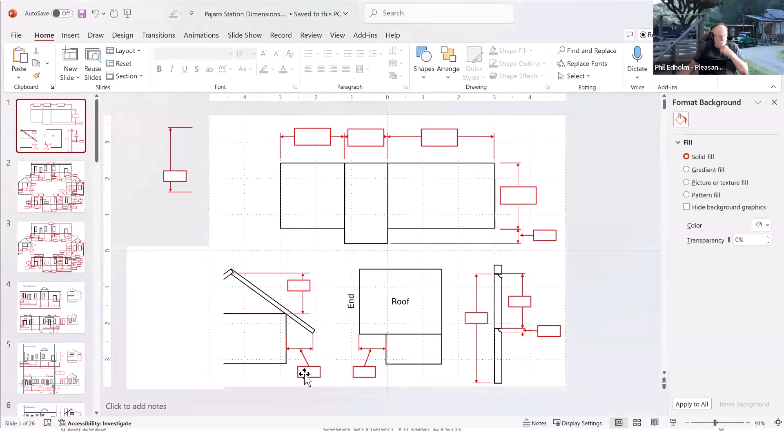I started figuring out what measurements I needed, drew this out, and put places on it. So when I went there, I had all the measurements laid out: the siding, the overhangs on the roof on either end, the basic footprint of the building. Then based on pictures I found on the internet, I did side profiles showing where all the windows and doors were, putting in all the dimensions. By printing these two sheets out and taking them with me, I had a reference.

The cool thing about this tool on your phone is you can walk up to the building, click to start here, walk from here to here, click again, and it gives you that dimension. Keep walking, click here, get another dimension, keep walking, click again, get another. It literally takes about 40 seconds to get 3 dimensions off the building, no tape measures involved.

What is the underlying technology - just the fact that the phone knows where it's at? It uses a combination of the picture and the GPS to figure out the position of a point in space, and positions that point accurately, so when you move the pointer 10 feet to another point, it knows in 3-dimensional space where you moved it.

Pretty neat. If you've never played with it, just click on the measure tool - you pick the thing, you'll see a point in the middle, there's a little button, click on that, then move it and click again, and you'll get the distance in between. It'll show you exactly what the distance is.

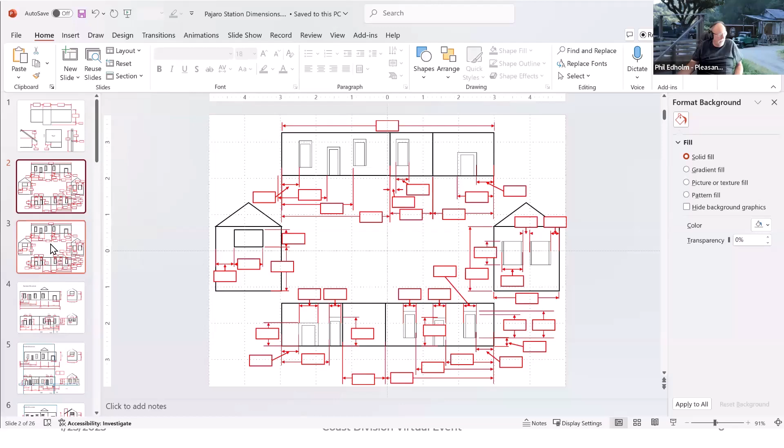Makes life really easy. So basically what I did then was take that and develop it, and it turns out my structure can't be that size because I'm limited to 12 inches - it's a little bit larger than this blue box. So what I've done is shrink the building proportionally.

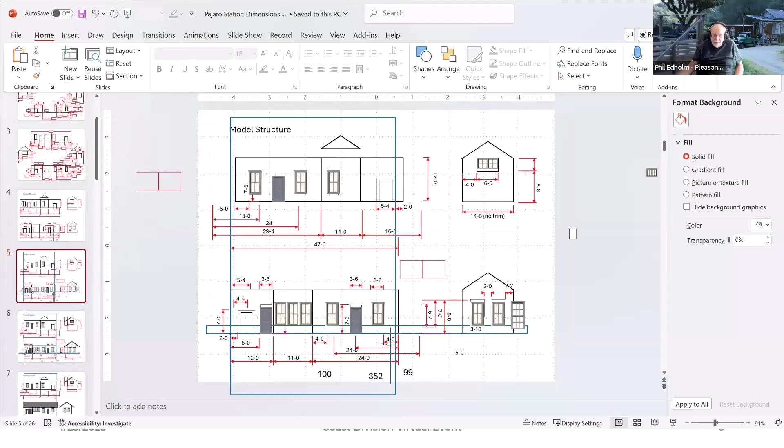Then of course the problem is I ended up going and taking some pictures when I went and measured it. What I figured out was that all of the windows and doors, going back to pictures from the 1890s and 1900s, have these pretty amazing architectural details on top. It looks like somebody was used to building mantles, and they put mantles on top of all the doors.

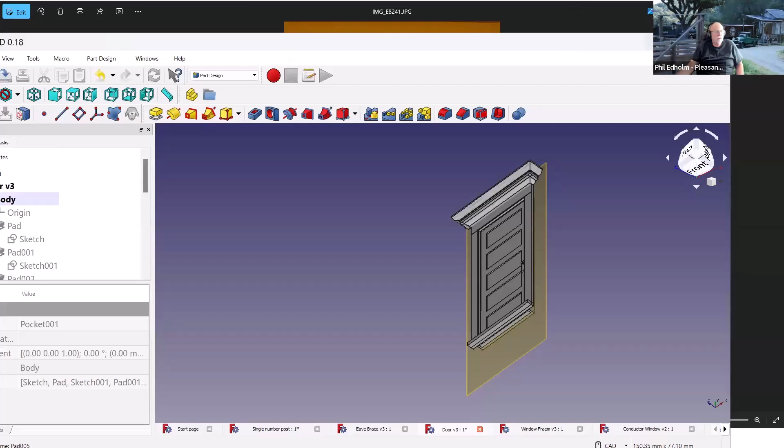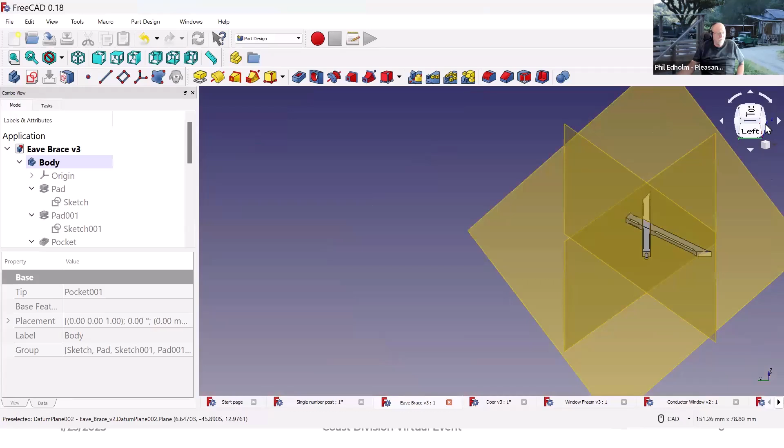So what I've been doing now is this - this is a door in FreeCAD. That's a door. This is the brackets that go on the end walls - if you look here, there are these brackets on the walls. So I've basically recreated that in FreeCAD. It's kind of hard to see here in this image because it's buried in all the planes used to create the stuff, and then the window frames.

So Fran is actually printing this stuff on his resin printer for me now. I appreciate him doing it because I don't have a resin printer, so hopefully I'll get that done. It actually turns out to be a 12-inch base, like a 12 by 8-inch base, so I'll have room to put a track on a piece of foam and make it look like a 12 by 12 thing to get by.

I have those lintels all over my house, over doors. The house was built in 1910, and we found out that was sort of throwaway apprentice work. These poor guys were getting like a dollar a day, and they would build these things up and just put them in and cut them. I've got them over weird places like bathroom doors.

Oh yeah, it's kind of like crown molding. Exactly. We did an addition on our house, and the guy came in and did the sheetrock, and there were wiggly lines at the top. I said, this is awful. He said, well, aren't you going to put crown molding up? I said, no, we're not, it didn't fit the house. He said, oh, you mean I actually have to make straight lines? It was quite the moment of excitement for the contractor.

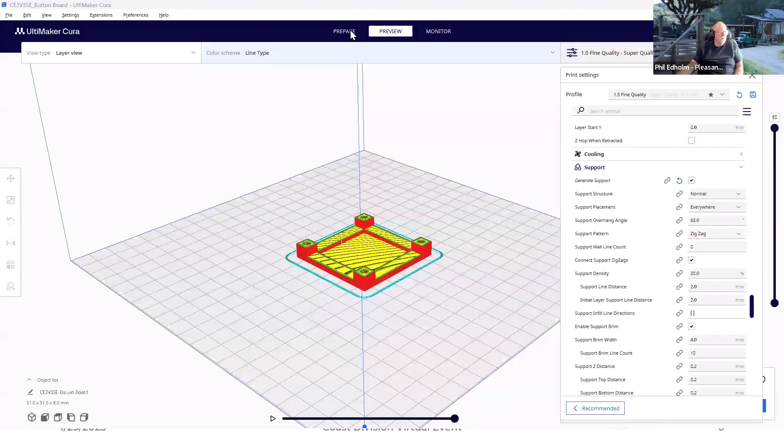So this is Cura. Now, this is not a resin printer, this is the slicer. This thing here is actually a button board. Let me show you something different here.

Let me pull this down - this is another project I've been working on. This is a holder for a Switch8, which is a DCC board for 8 turnouts. Because we have so much current demand on our turnouts, you can't use it directly, so this board combines with a couple other little boards that hold single board relays. They look like this - these are a dollar each on Amazon.

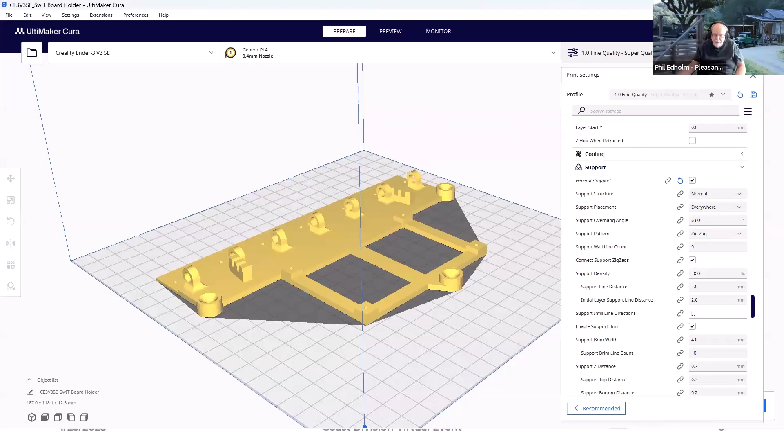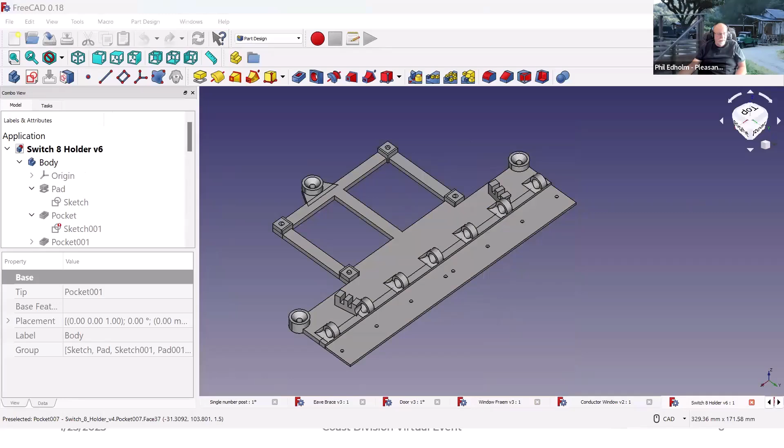So this was defined in FreeCAD as a file somewhere in here - this is the Switch 8 holder file. This file here is actually the FreeCAD definition of all the things that make up that item. Then you basically load it down into here, and once it's loaded, you go ahead and slice it.

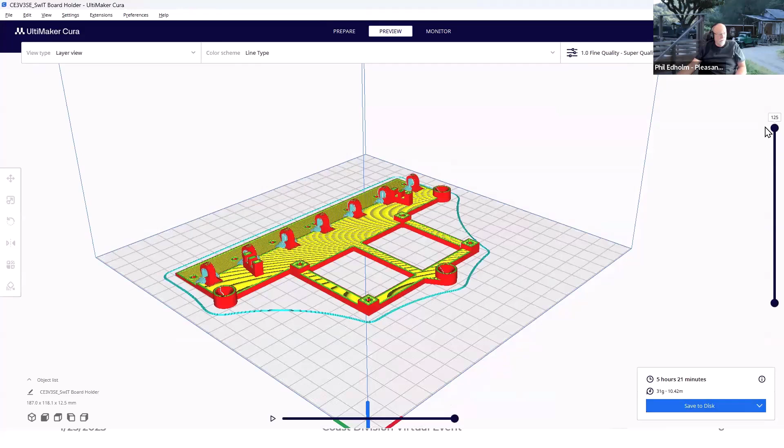What this does is it goes through a process, and it takes a second. It figures out what the instructions should be, and then it lets you look at it - this is actually the object, and you can look at what all the layers look like and see how it builds up.

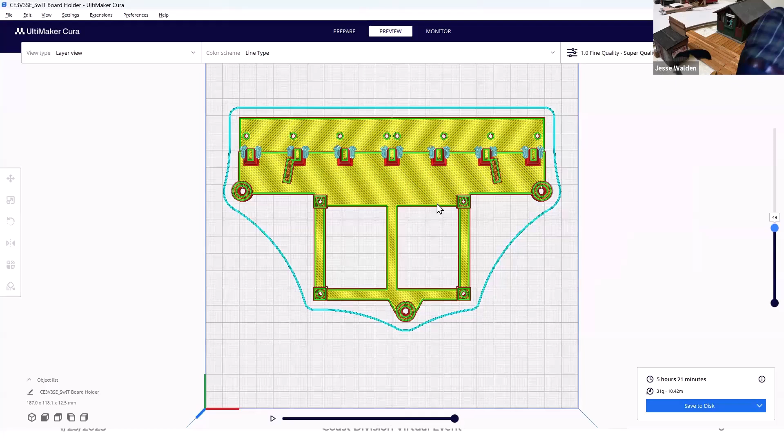What's nice is if you take this view, you can go in and actually see at each layer. I've got a separate tool which lets you pick one of these layers and decide whether you want the head to run this way. If you pick a layer here, you can actually watch what it does on that layer.

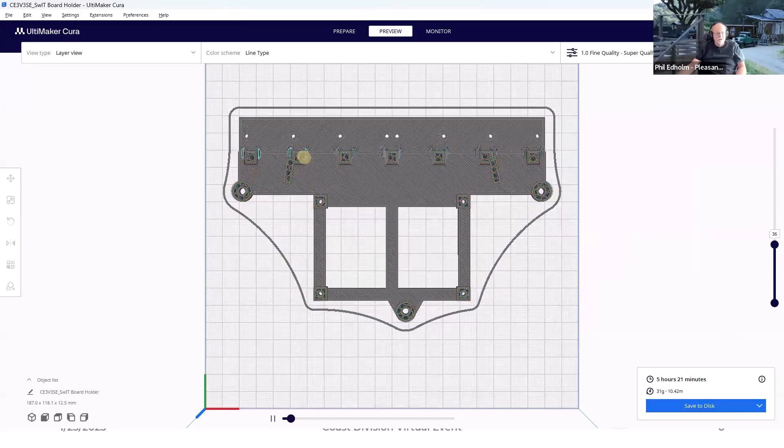So that's actually telling the print head what to do - this is showing how a filament printer works. But the resin printer works very similarly in terms of defining something that goes to the resin printer, which basically does a shot. Each layer is a shot on the light system, and it does the same thing - it figures out, on this layer, which of the elements on the light should turn on to burn a pixel in the plastic. It's the same kind of concept; each layer gets treated the same way, except the resin does it as a single shot.

Fran did a Tinkercad clinic, which I would recommend for most people. I started using FreeCAD, I just haven't changed. I think Tinkercad's a lot easier to use. I've been using Tinkercad, it takes a while. It's got a learning curve, but you just have to keep making things with it to get the hang of it.

So this basically then, I got to turn off my background here. The problem with having a background on is you can't show things. So this is one of the things the filament printer is really good for, doing all these kinds of tools and other stuff.

So I don't think Tinkercad is free anymore. It is still free. What was your thought about Tinkercad not being free anymore, Ken? The last time I tried to use it, I got a thing from Autodesk that said I needed a subscription. Yeah, you have to have a subscription, but it's a free subscription. It's online now, they used to have an offline app, but it's all purely online now.

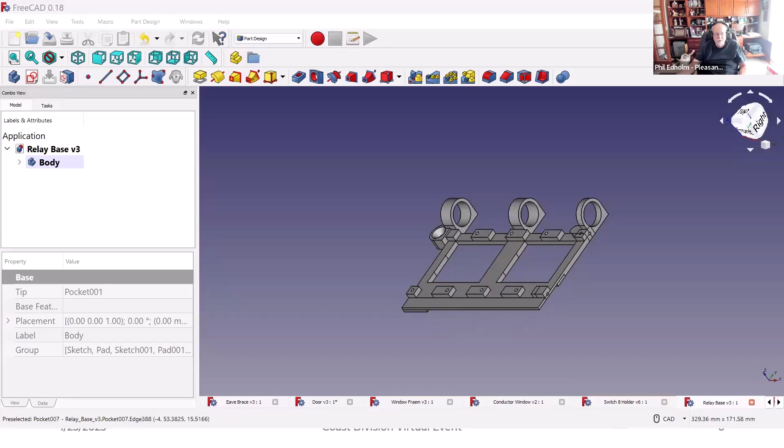So one of the things you have to do is, this is big enough that you have to have it in three pieces. So basically the way this works is this piece here, if you notice, it's cut in there. That actually glues on top of the piece I showed you that's already done printing, and this holds the relays, these individual relays here. That's actually on the printer right now.

So the idea is you take the output of the switch 8, which is this guy, and this controls 8 turnouts, and then there's a relay for each one of the turnouts that sits here and connects over here with a couple of diodes, so that you can run 2 or 3 sets of LEDs and 2 turnouts on each output.

Because the switch 8 only has about a 40 milliamp output current, and that's not enough to run things. What happened when we started connecting the switches to the layout in Pleasanton, the first time we did it, instead of getting 14-volt output, we got 3-volt output because there was so much load between the turnout motors and all the LEDs that were on each line to show people at different places what was going on.

We don't worry about current when you're controlling things with a double pole, double throw switch.

Fun toys. So, who else has something to share today?

I don't know, I'm just sort of mulling things around, talking about things to present. I'm sort of going back to my earliest attempt at a profession as a historian, and I'm very interested in what we call business history, which in our case is specifically railroad history. Not viewed as a simple outline of when the track was laid, but more along the economic business rationales and how these things grew over time.

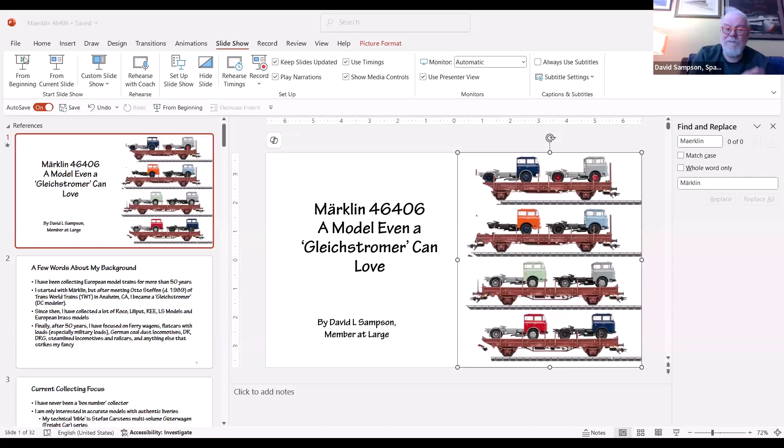I'm an NMRA member, but I'm also a member of European Train Enthusiasts on and off for quite some time. This is a club that was started in Sacramento, but now has chapters all over the United States. And this is the kind of stuff I tend to do.

I'm 75. I've been collecting for 50 years. Doesn't mean I've gotten any smarter, but now I'm kind of interested in looking at models and seeing whether they're prototypically accurate rather than simply going out and buying them.

So at least a recent piece of analysis I did was on a Marklin model. Most of you probably know Marklin is nominally for AC, but this is kind of a tongue-in-cheek thing where I say, well, here's this Marklin model of 46406, and it's a model that even a Gleichstromer can love, and a Gleichstromer is a DC person.

Within the club, we used to have like two sides. There were the Marklin people, which we derisively called Marklinistas, and then there were the DC people who were the other extreme. So I went through this set, which is kind of interesting.

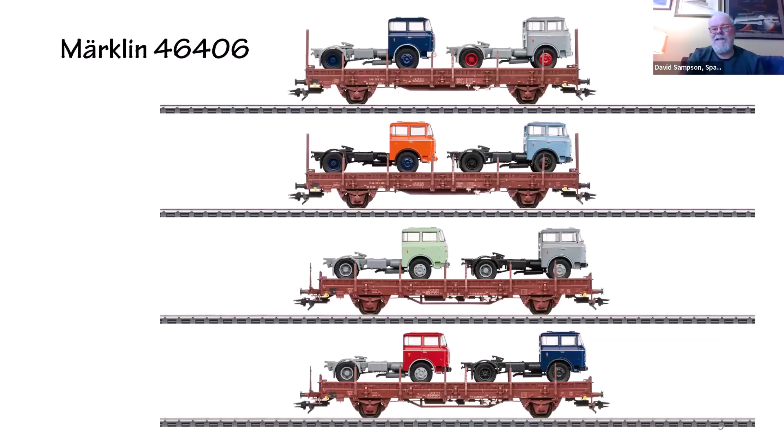This is background, you don't care about that. This is what the set looks like. It sells for $260 to $300 retail. Marklin on their website has a description of it, and it's kind of interesting because it's actually got two each of two different kinds of railroad cars.

And these railroad cars were actually built for the East German Railroad. And that was in itself kind of interesting, because in their crazy planned economy over there, East Germany didn't have in its job jar building these railroad cars.

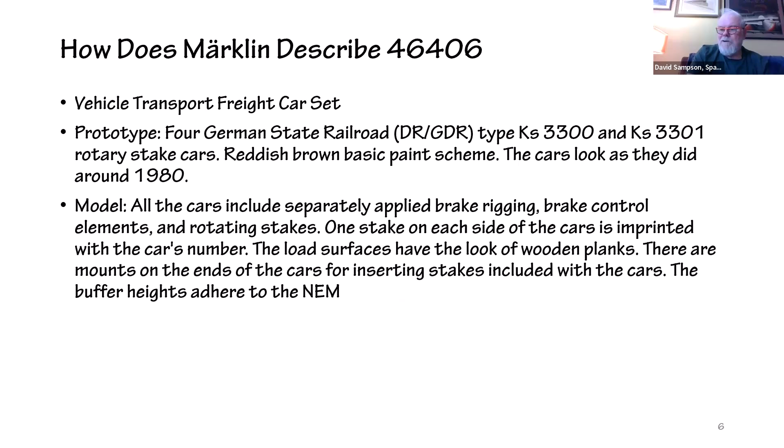So they had to go to a manufacturer in Romania, which was kind of interesting. Let me jump to the more interesting thing. You've got a total of 4 stake cars and 8 nice tractor trailers. So here's a template I use: first I want to talk about the prototype.

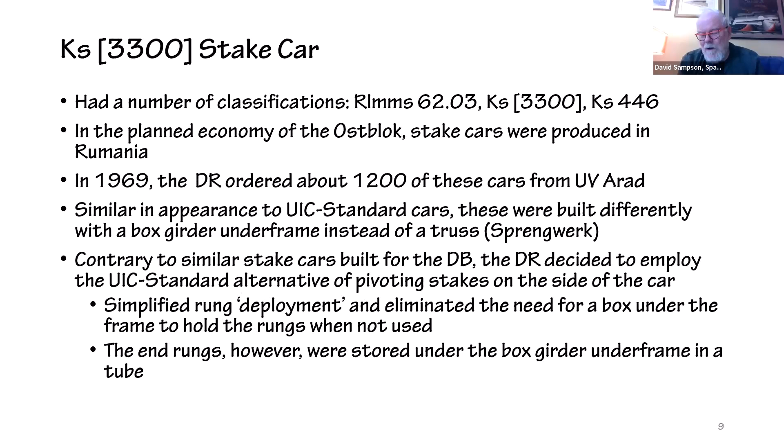This is one of the stake cars, a KS 3300. What's different about it? When was it made? How many were produced? Sometimes I talk about what happened after the change, when East Germany didn't exist anymore. Turns out these cars were pretty popular and were taken over by the new West German Railroad. I'm just trying to give you an idea of what I talk about.

Then there's a page or two about the other stake car, which I screwed up there, which is another thing.

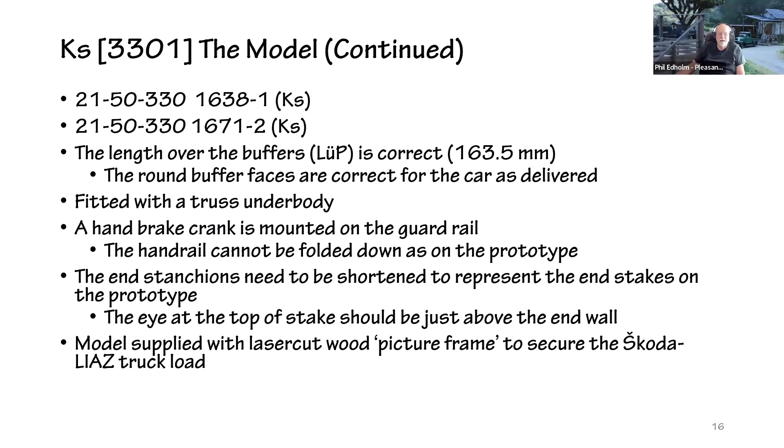David, is there a way I can contact you offline? Sure. I spent 19 months with the 3rd Armored Division in Germany in the 1960s, but still. I think you can see my email in some NMRA database or something. Dave, why don't you just throw it in the chat? Post it in the chat maybe. Yeah, I'll do that. I'll email it as soon as I get that done.

So yeah, I talk about that other car. This is kind of a joke - you always have to have some humor when you're making these presentations.

One of the problems I noted with these cars is that they're stake cars, and East Germany chose the kind where the stake is permanently installed on the side and simply rotated into the vertical position. Oddly enough, when you look at the stakes, one has the car serial number on it, but when the stake is folded down, the serial number's upside down. What the hell - Marklin's not that stupid. How did they ever manage to do this?

So I thought about this for a couple of days. Let's go to the next slide here. We're going to try to go to the next slide.

Turns out this freight car is sold in another set. I found this out not because I have a giant collection of Marklin catalogs, but the Marklin website works like Amazon - when you buy a product, at the bottom it says if you bought this, you might be interested in something else. So I found out about this other model, 45042. I looked at pictures of it, and lo and behold, the numbers when the stake is folded down are not upside down.

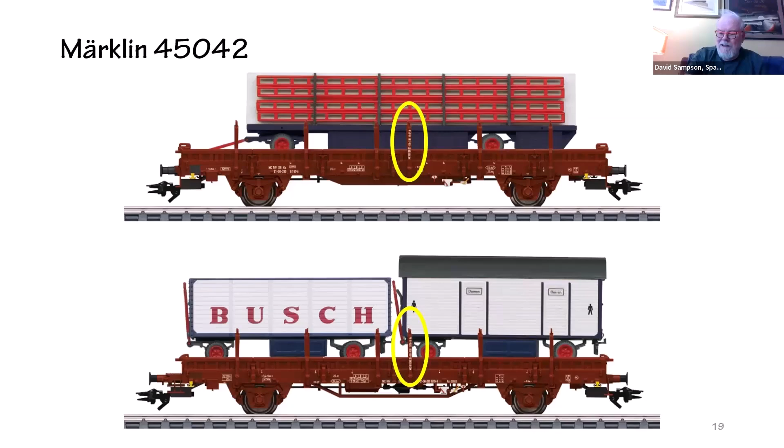This bothered me, I slept on it, and finally concluded this was an assembly problem - that Marklin had put these stakes in the wrong place. When you look at the side of a car, this yellow oval represents something near the middle: cars to the right, the stakes rotate clockwise, and stakes to the left of the middle rotate counterclockwise. So all you have to do is move the stakes around. Luckily, that's easy to do. I won't go into all the details.

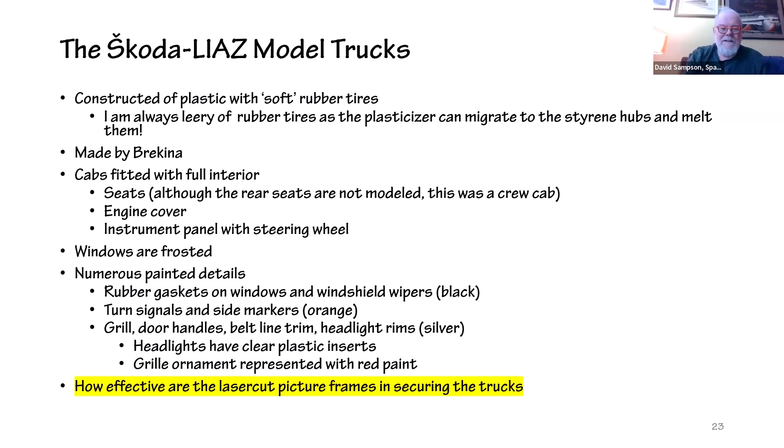Then it got kind of interesting looking at the trucks that were the freight car loads on here. The trucks are Skodas, and unfortunately I don't recall - besides, there's not a lot of information about these Skoda trucks. But they're nice models. Marklin didn't make them; they were made by another company called Retina.

And then I'm a collector at heart, and I found out that Marklin did some really nasty stuff to confound the collectors. First of all, this model never appeared in the annual catalog. It never appeared in the catalog that showed all the new models for 2024. It appeared only in one catalog that showed the summer novelty models.

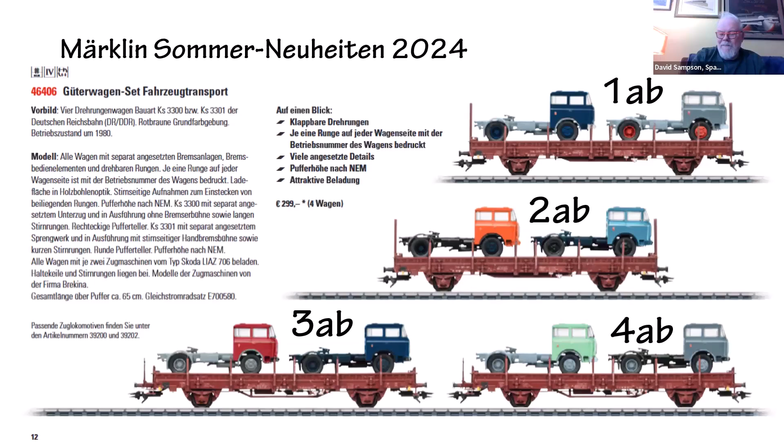Okay, so here's a picture of it, and I've identified all the trucks. There's car one, with an A and a B, the left and the right. Then car two, with a left and a right. So then you go look at the website art, and the website art is a little squirrely here because they interchange the order of 3 and 4 - so obviously the art department isn't talking to somebody else.

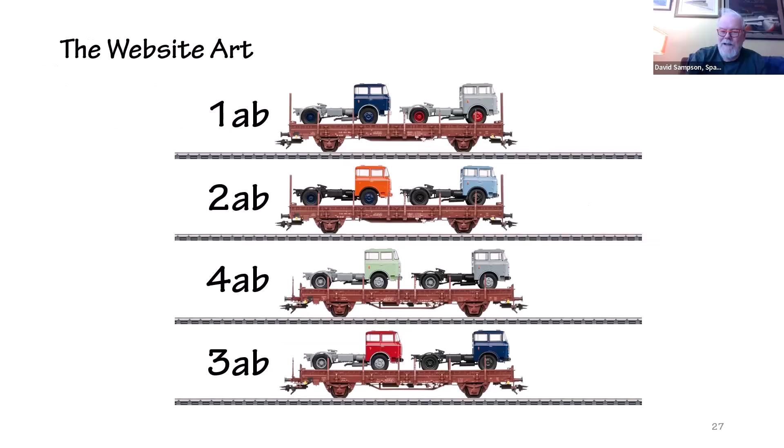But then you look at the box art on the model, they scrambled it again. So this is kind of funny. You know, it's not order 1, 2, 3, 4. It's order 4, 3, 2, 1.

But where it really got devious is when you look at what's in the box. I'll tell you, you had to work to scramble things up as badly as it is in the box. And, you know, how this happened, it's one of the mysteries of a major toy manufacturer.

And I talk about the wheels because the wheels that Marklin puts on their models do not meet NMRA standards. They're non-isolated, non-insulated, and they're also NEM flanges, not NMRA flanges. But luckily, there's some enterprising little shop in Berlin, very difficult to deal with, that makes isolated wheel sets with RP25 flanges.

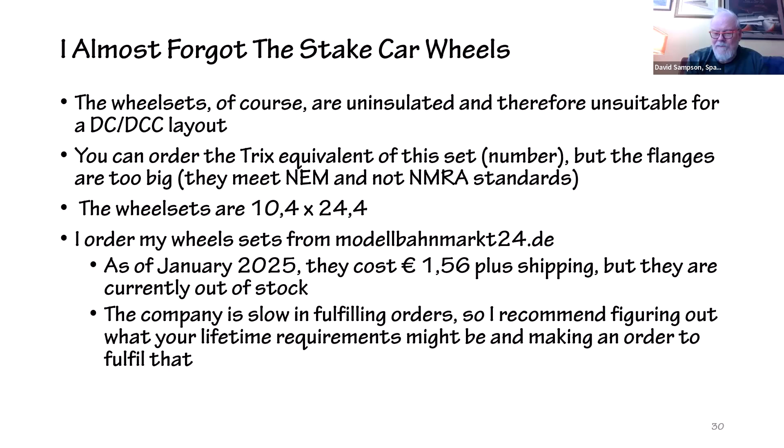Okay, so in any event, that's kind of what keeps me interested now besides collecting and operating my trains. I'll stop the share here. And so that's what floats my boat.

I'm done. Nice research. Pretty good. Yeah, pretty good. Good. Well done. Thanks for sharing that. Yeah.

Okay. I have to go and push bread around. That's my other big hobby, by the way. I make bread. And so we get up at 6 o'clock, that's where the dough is. So.

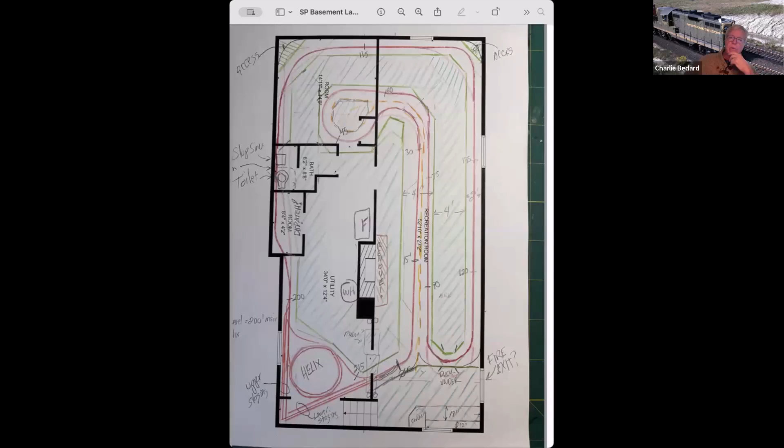So I'm going to make a completely different comment. I would not take out the concrete wall. I think you're buying into it. So if you basically said where that loop is on the bottom right, where you've got the duck under on the bottom right.

Oh, here. Yes, the return. If you move that up about 4 or 5 feet and just carry it all the way over to the wall where the furnace is, that aisleway becomes very wide there. Then you run it around and put a loop up at the top that goes from the right side of the concrete wall through the wall to the left side, from there over to the left side and back down the left side.

So what you do is you basically come into the layout by the door that's by the helix. You walk in there, walk up, go in the door right there. Right here? No, your left. Turn to your left — where you just went straight is blocked off. So that's how you enter the layout.

Then you go around the room to the other side. The other side, you come around there, come back down, and that's a very wide aisle with the layout. You run the layout around the water heater and the furnace on the other side, where you come in there.

So now you basically go around the wall and use the wall on either side. That way you only have to cut one hole in the wall at the top to go through, up here. So what you can do is leave the rest of the wall just the way it is, and use it as your room break.

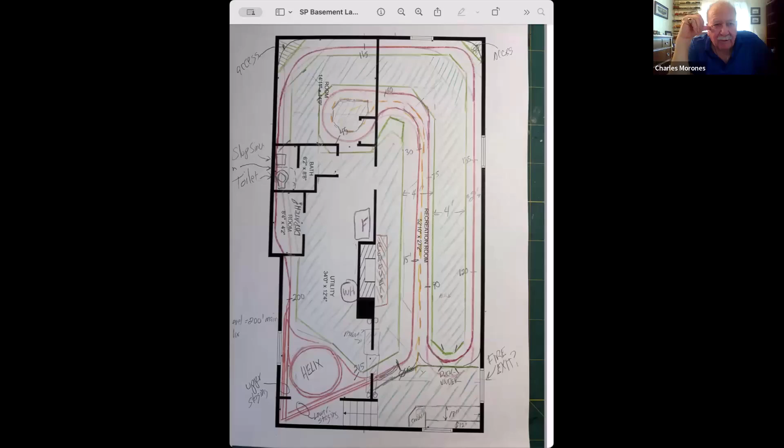Okay, the next person had a thought. Yeah David, your toilet there -- you want to have 3 foot clear in front of the toilet, so you're going to have to move that slop sink a little further out. Thank you.

Yes, it's Southern Pacific running between Grants Pass and Crescent City, a connecting line making a connection south from Crescent City to Eureka and connecting to the Northwestern Pacific, so that this railroad is carrying bridge traffic from Grants Pass down to Eureka and points south. The set of lines are built around the basic idea that Mount Shasta has eliminated traffic north and south all around it.

I have some minor familiarity with the area, so I would really think about doing just the Eureka part, modeling only a piece of that. Otherwise, I think you're taking on way too much in terms of the amount of railroad you're covering. Real world, from Eureka to Crescent City is too long of a stretch.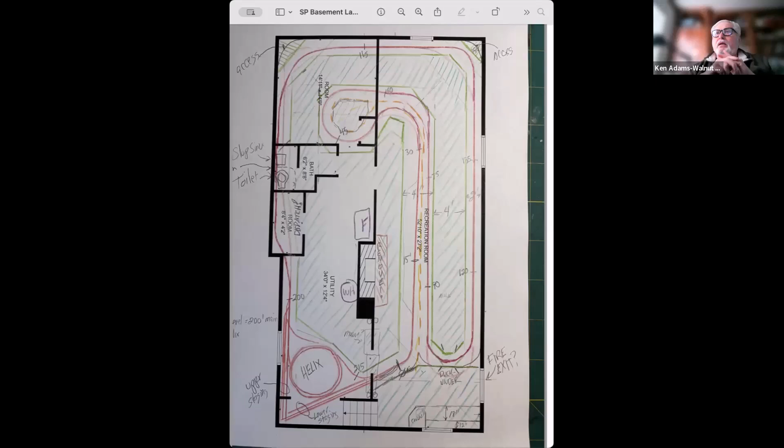I basically think, from my own experience of starting something when I was 75, it's going to be tough. And I had to, because the ceiling collapsed on my old layout, and I had to rebuild it.

Oh dear. So what are your room dimensions, just out of curiosity? The actual space itself. Recreation room, it says 52 foot 10 inches by 27 foot 2 inches, but that actually is the entire width of the basement. It's 52 10 long by 27 2 all the way across. So that would be by the toilet there at that point. At that toilet point, it's the 27.

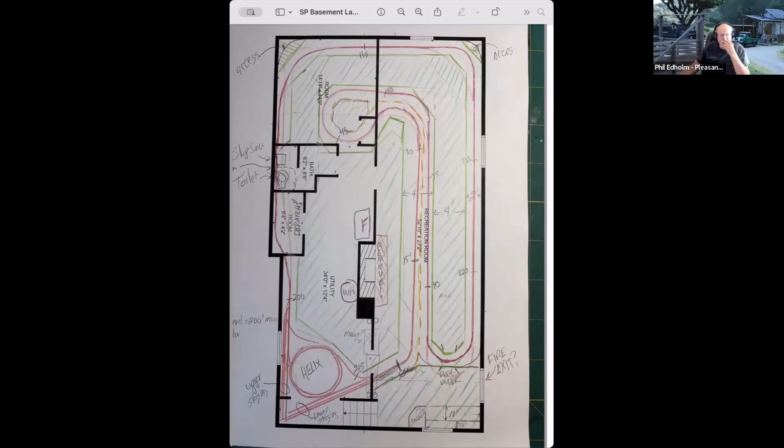Does that include the walls then? No, I have not gotten the tape measure out and actually measured from the far wall to the far wall, but I'm pretty sure the realtors would maximize the numbers. The data given said these measurements are pretty accurate, but they're not guaranteed. But I'm trying to figure out how to try to be conservative on how much railroad I'm cramming in so that I'm not trapped if it turns out there's 6 inches less here or there.

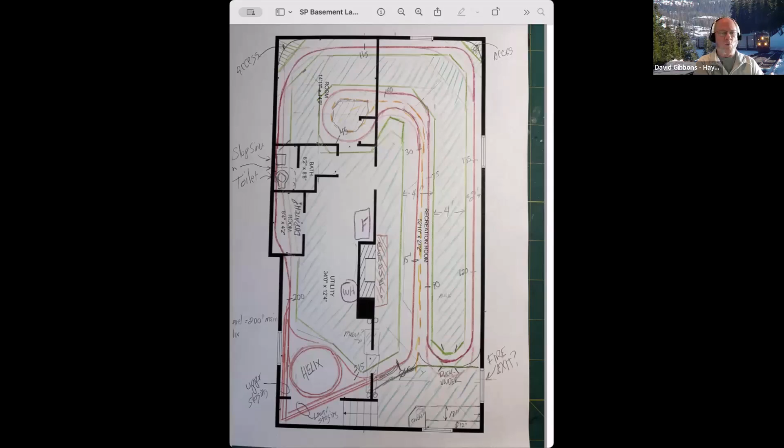The 2 foot width, for example, of railroad, having read through Tony Koester's book on multi-deck design for model railroads, I may not even have 2 foot wide sections of layout where it isn't necessary to, again, give myself room and slop, particularly in areas like around this fireplace here.

I'm pretty sure I'll be able to clean this out down to the concrete so it still meets code, but there's a whole bunch of code compliance inherent in all this sort of fooling around. So this is again something for me to question, for you guys to throw rocks at, and just go from there. But good points to everybody on the fact that replacing the concrete block wall may be a very expensive or impossible thing to do. But I'll find out.

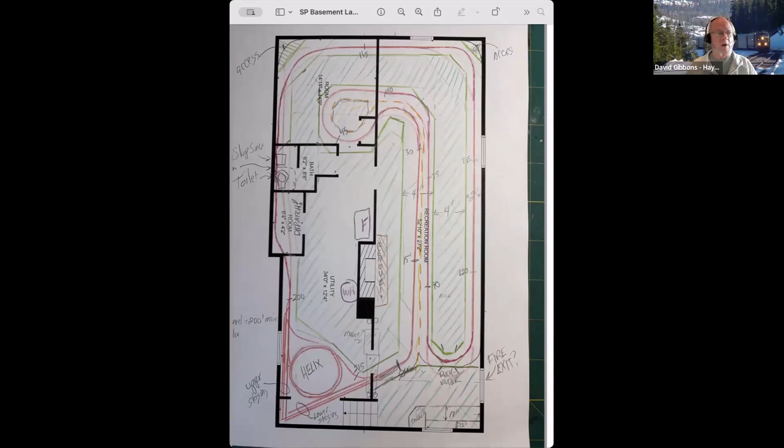Well, thank you everybody for your comments on it. I think I've got Phil, your ideas on how to rearrange the track in there. I've got that sketched out on a separate piece of paper. So I will stop sharing and pass the ball to the next person.